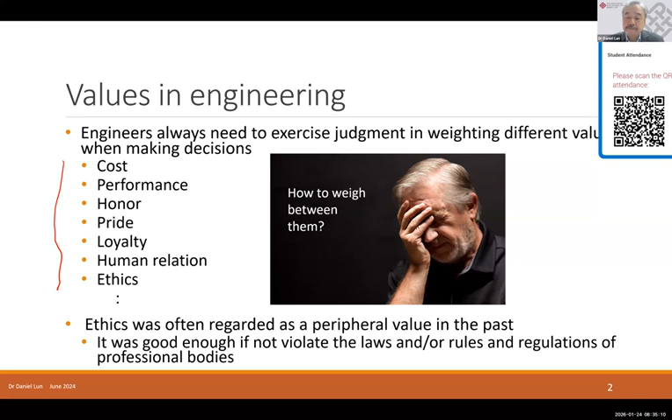So do engineers really have no responsibility to benefit mankind? I discussed last week that although the code of ethics of many professional bodies contains statements like 'engineers shall ensure their integrity in performing their professional duties,' these are more preventive ethics statements. They require engineers to be honest, honor commitments, avoid conflict of interest, etc.

But we can also find statements in codes of ethics of professional bodies such as 'engineers should hold paramount the safety, health, and well-being of the public in performing their professional duties.' So it's clear that engineers should benefit mankind. But how do we do it? How do we benefit mankind? And actually, what is mankind? What is well-being?

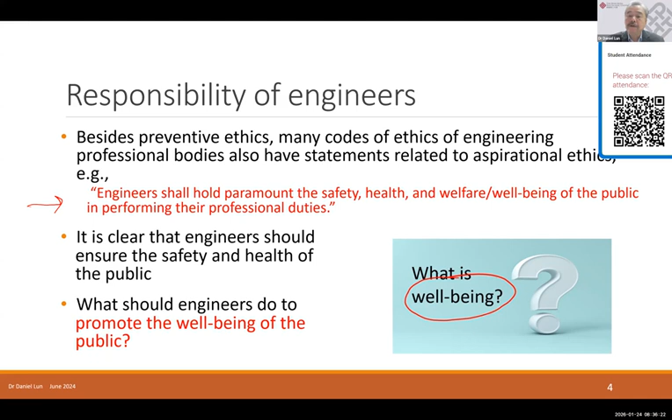Many people just relate well-being with happiness, meaning that if engineers should promote the well-being of the public, then engineers should promote the happiness of the public. But when we look at the daily duty of engineers, usually we just develop products or services that make people more convenient, make their lives more comfortable. These are more about the fulfillment of material needs. So can the fulfillment of material needs really bring true happiness?

In fact, everyone has their own standard of true happiness. I think even you may have your own standard of true happiness. So what is true happiness?

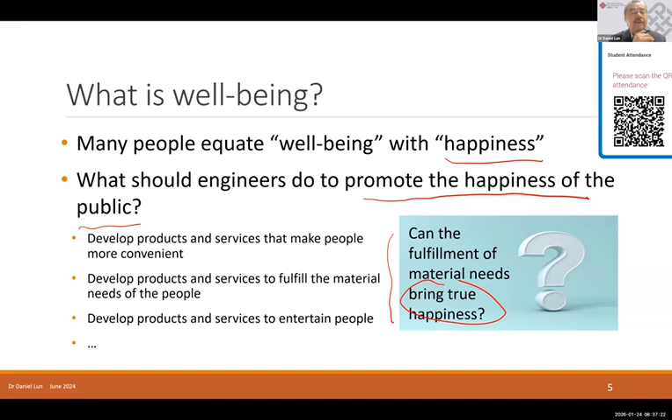In order to know whether people are happy on planet Earth, the United Nations actually sponsors an organization called the Oxford Wellbeing Research Center. They regularly produce the World Happiness Report. In the report published in 2024, which summarized the happiness index of people in different countries from 2021 to 2023...

I think some of you may be jealous of their social welfare system. Now, how about us? We're living in Hong Kong or China. Are we happy? In the report, we are ranked 86 and 60. It seems we are not so happy. People in Japan are a bit better, ranked 51. Surprisingly, people in Chile rank 38, more happy than us. Now, in terms of material needs or material fulfillment, Japan, China, and Hong Kong must be much better than Chile, right? So why are the people in Chile happier than us?

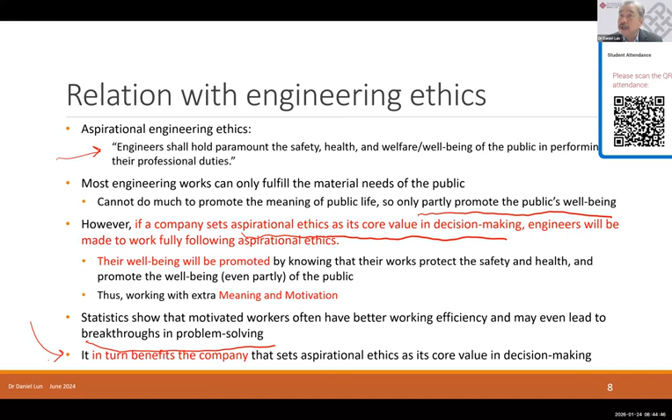In order to further elaborate this point, let me give you a case study. This case is about the Honda CVCC engine. I think you know Honda, right? Honda is an automobile manufacturer in Japan, now a major one, but an old brand.

But however, in 1972, Honda was once the most famous automaker in the world because they developed the first low-emission CVCC engine that leapfrogged all American big players at that time. Why was it so successful? Because the company solved a very difficult technical problem that all American big players thought was impossible to solve.

It was achieved by pulling together everyone in Honda to work on this problem and solve it. In fact, the whole story is very hot-blooded, just like some hot-blooded Japanese TV drama. In fact, some Japanese TV dramas really used this story as the blueprint of the storyline.

The whole thing starts with an engineer called Mr. Soichiro Honda, who founded Honda Motor Company Limited in 1948. He was known as the god of the two-wheelers and the god of technology in Japan. Why two-wheeler? Because before making automobiles, Honda was more famous for making motorcycles.

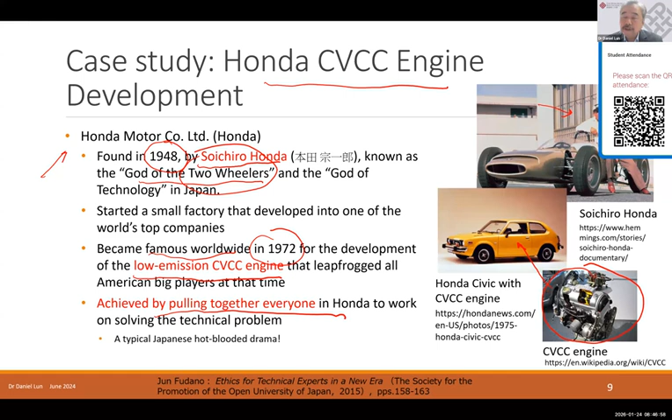Before I go on to explain this CVCC engine, let me take a look at the air pollution problem in the US in the 60s. Automobiles were introduced into the market in the US, and by the 60s almost every major city in the U.S. had automobiles running on the road. In fact, the air pollution problem in the U.S. was already very serious. According to a scientific study from the period, more than 60 metropolitan areas in the U.S. suffered from extremely serious air pollution problems.

A study in 1966 estimated that out of a total of 142 million tons of pollutant in the U.S., 86 million tons, about 60%, could be traced back to automobiles. In some densely populated areas, such as Los Angeles, the number can be close to 90%. Almost all pollutant came from automobiles.

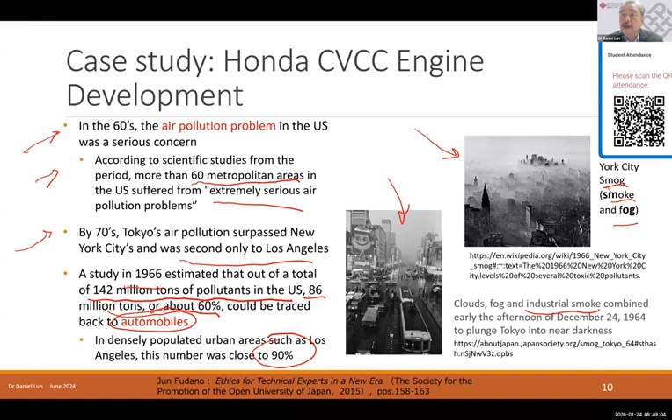So with such a serious air pollution problem, people had to do something. In 1970, a senator from Maine called Edmund Muskie proposed a major revision to the Clean Air Act in the US. The act was immediately approved by the Senate, and President Richard Nixon signed the Clean Air Act into law in December 1970. So what is that act about?

It requires that all cars emit only 1/10 of the carbon monoxide and hydrocarbons by 1975 - only 5 years after the announcement of the act. Not only that, cars made in 1976 also needed to produce only 1/10 of their current nitrogen oxide levels.

Because the schedule was so tight, all automakers such as GM, Ford, Chrysler - the so-called Detroit Big Three, because all three companies had their headquarters in Detroit - thought that it would be impossible to meet this specification in such a short amount of time.

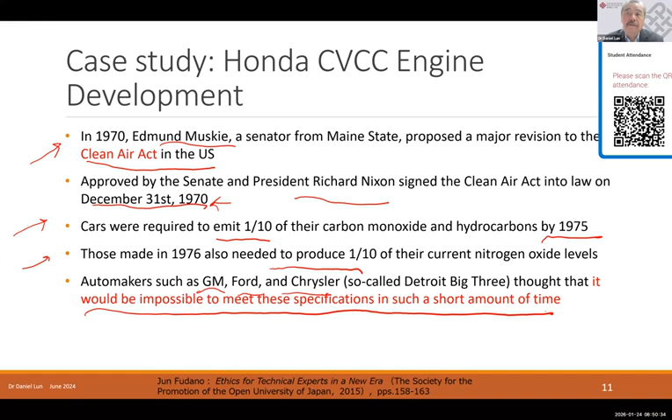However, Mr. Honda thought it differently. He thought that it was a golden opportunity to surpass its competitors. In the 60s, although Honda was very famous for making motorcycles, in automobiles Honda was still far behind its competitors such as Toyota, Nissan, not to mention the US big players.

But in fact, Honda was aware of the air pollution problem caused by automobiles well before the announcement of the Clean Air Act in the US. In 1966, Honda set up the Air Pollution Control Research Lab, called the AP Lab, focused on developing solutions for combating the air pollution problem of automobiles.

However, at that time no one was doing this kind of research, so everything needed to start from zero. According to R&D director Mr. Date of Honda, he said we had no answer as to what caused the air pollution problem back then. All we had was a device that measured high carbon monoxide. We even had to ask what nitrogen oxide and hydrocarbon were. In Japan, there were no devices available to measure them. So everything needed to start from scratch.

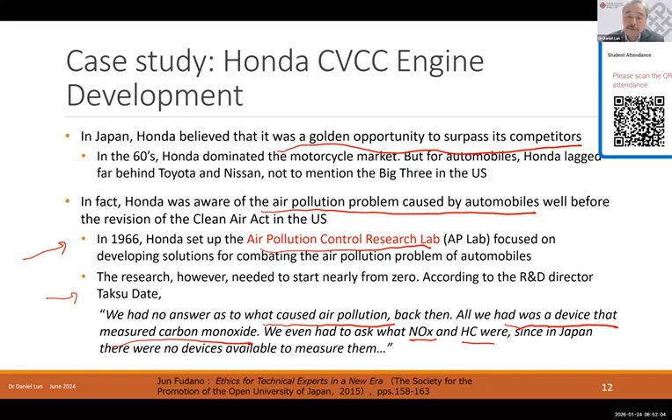Although most automobile makers at the time believed it was impossible to achieve the Clean Air Act targets by 1975, they did have their own proposals. The most popular one at that time was a catalytic converter.

I think you may have seen this kind of catalytic converter before. It is installed in the exhaust pipe of a car, something like this. Some years ago in Hong Kong, you may find all minibuses had a catalytic converter in the exhaust pipe. Actually, that one was enhanced by a PolyU professor from our mechanical engineering department.

So what is that catalytic converter? In fact, this is a box that contains some metal particles like platinum, palladium, and rhodium. These metal particles have a chemical reaction with the pollutant and break the pollutant gas down into less harmful molecules.

So it seems that the problem can be solved. However, at that time, gasoline contained lead. Nowadays, when you go to a gas station, you find unleaded gasoline, right? But at that time, all gasoline contained lead. That lead could be exhausted with the pollution gas into the converter and cover the metal surface, rendering the device completely useless. Also, the metal particles could leak into the environment due to the vibration of the car, introducing other kinds of environmental problems.

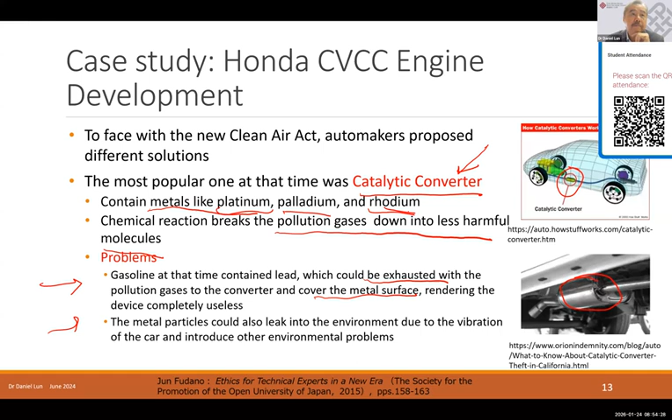So what Honda has done is totally different. Honda believed that rather than following other people's routes, they should explore a more environmentally friendly solution, a completely new engine. The research team thought that the best way to reduce the amount of pollutant would be to optimize the air-fuel ratio to ensure complete combustion.

The term complete combustion is very common nowadays, right? But at that time, no car engine could achieve complete combustion. That's why the CVCC engine is so famous at that time.

So what is CVCC? The first C stands for compound, because the engine has two chambers of different air-fuel ratios. The V stands for vortex, meaning the engine has a kind of swirling wave inside the engine cylinder that increases the combustion speed. The last two C's stand for controlled combustion, referring to the engine's ability to manage the speed of its combustion.

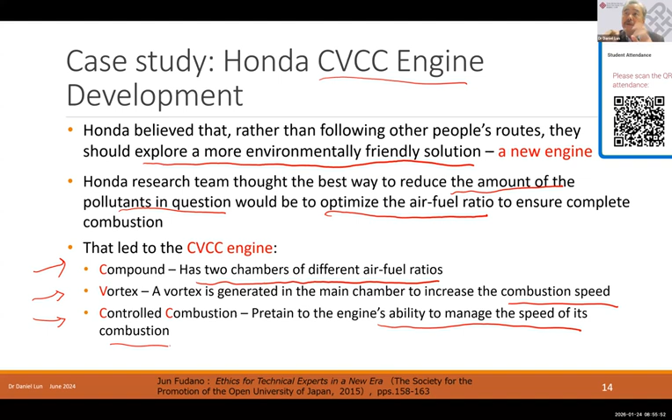So if you're interested in the detail of this CVCC engine, you can take a look at this YouTube video. It's very interesting — even if you are not a mechanical engineer, you can still understand it easily.

Here I would just like to briefly mention why this CVCC engine can achieve complete combustion. I think you know this is the engine cylinder, right? Inside the cylinder, there must be a chamber where we put fuel and air, a mix of fuel and air. So when the spark plug sets a fire, the fuel will burn and introduce an explosion. The explosion will push the piston down and let the piston go through one cycle and go up again due to inertia.

And then when it goes up, the air and fuel will be compressed. If you set a fire again in the spark plug, they will explode again. The explosion will push the piston down again, and the car will run. So that's the basic principle of a car engine.

So why couldn't the traditional engine achieve complete combustion? Just because the fuel inside the main chamber is too much — too much fuel, not enough air. So some of that fuel cannot burn completely, and leaks out from the engine to become pollution.

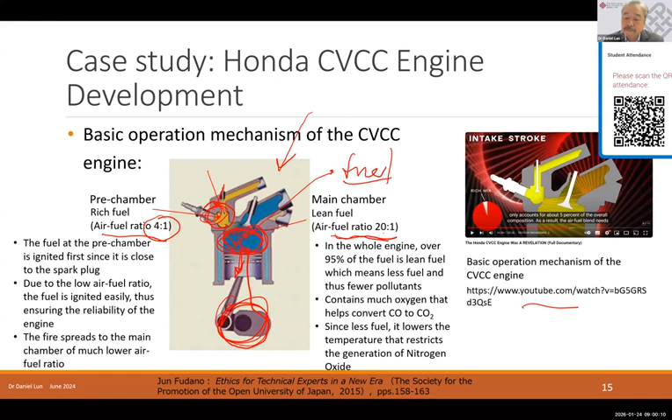Based on the success of the AP Lab, Mr. Honda announced in a news conference in February 1971, just 2 months after the announcement of the Clean Air Act, that they had successfully built the CVCC engine that met the Clean Air Act. That announcement really surprised all automakers at the time, because although they knew Honda was making that new engine, they did not know Honda could build it so fast. But actually, Honda still took another 20 months to put that CVCC engine into a real car, the Honda Civic, and bring it to the market.

As I mentioned before, the CVCC engine requires much less fuel than other engines. That's why the Honda Civic was ranked the most fuel-efficient car in the US for 4 consecutive years, from 1975 to 1978.

Honda did not just keep the technology for themselves. They also licensed the technology to other car makers, such as Nissan, Toyota, Ford, Chrysler, Isuzu, etc.

But there's an interesting story about this. At that time, GM, one of the major car makers in the US, did not seem to endorse the value of the CVCC engine. The CEO once said, 'I have looked at this design, and while it may work on some little toy motorcycle engine, I see no potential for it on one of our GM car engines.' So this GM CEO just looked down on the value of the CVCC engine, thinking it could only be used in some toy motorcycle engine.

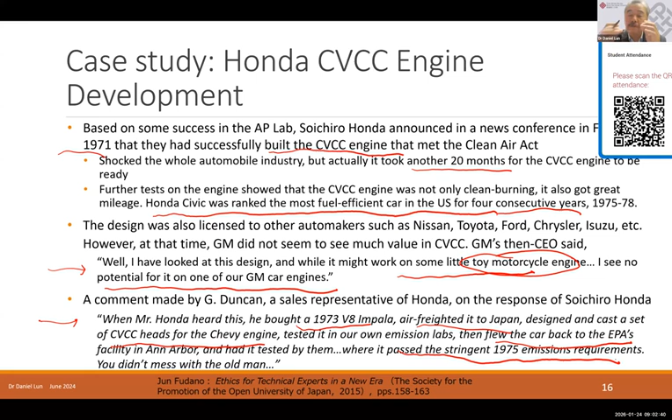So when Mr. Honda heard about this, he bought a 1973 V8 Impala, a famous GM car, air freighted it to Japan, put a CVCC engine into it, and flew the car back to the US and made a test, passing the stringent 1975 emission requirement. So in this whole event, GM really lost face.

Although there was more development of the CVCC engine in the following years, perhaps we can pause here to analyze the case first. As you can see, the success of the CVCC engine was mainly due to the vision of Mr. Honda, because Mr. Honda did not follow the route of other companies, but tried to develop a brand new solution, making a completely new engine.

However, it is still just a vision or direction. The whole thing still needs to be realized by the engineers of the company. Although your boss has a lot of vision, the realization work still needs to be done by the engineers. Obviously it is not easy work - otherwise other companies could do it too, right? All companies thought it was impossible to solve the problem, but Honda's engineers could solve it. Why?

First, Mr. Honda is actually well known for his man management. He always worked with young engineers together in the factory, always talked with them, extolling the joys of making things with their own hands. Most importantly, Mr. Honda always aroused awareness of the meaning of the project - that is, to combat air pollution, a mission of the car industry for the future of mankind.